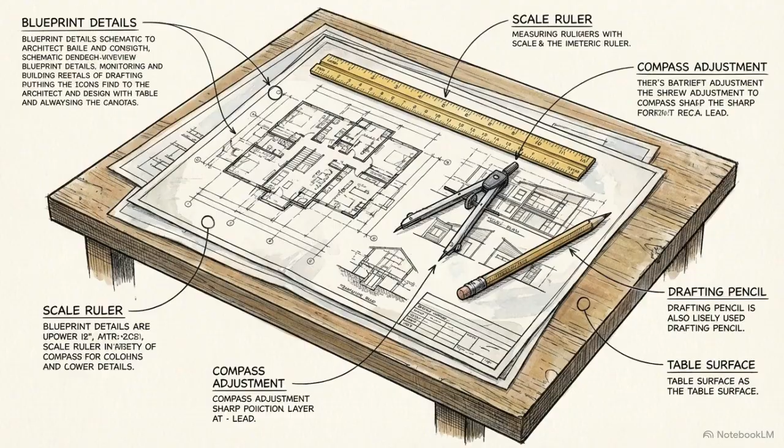Building construction is the systematic execution of planning, architectural, and design work. It is the process of translating technical drawings into a permanent physical structure. To succeed, an engineer must solve a continuous problem of scale, bridging massive environmental forces with microscopic chemical reactions.

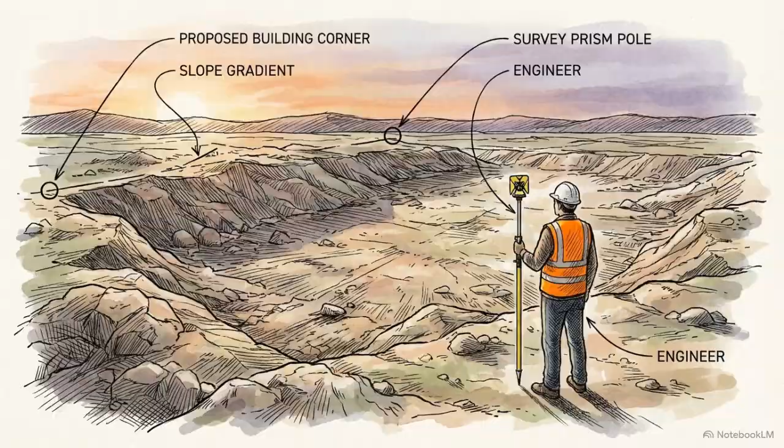Before a structure can rise, the builder must first master the macro environment, analyzing exactly where and how the building sits on the earth. Then they must master the microenvironment, the strict physical and chemical properties of the materials holding it together. We are going to track this process from start to finish.

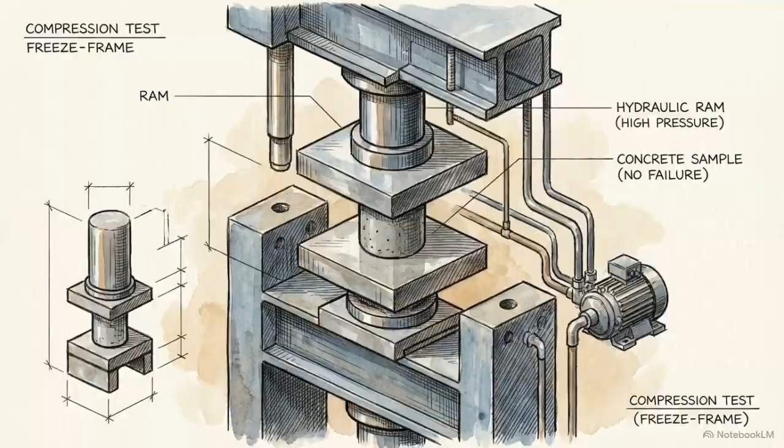We will select a site, map its physical threats, and formulate a custom concrete mixture designed to survive it. A finished building standing against the elements is the result of hundreds of hidden, interconnected calculations.

Site selection is a highly project-specific job. Every decision optimizes for two non-negotiable targets: safety and economy. Engineers analyze the terrain to immediately rule out specific hazardous zones, avoiding waterlogged ground, unstable backfilled sites, and riverbanks.

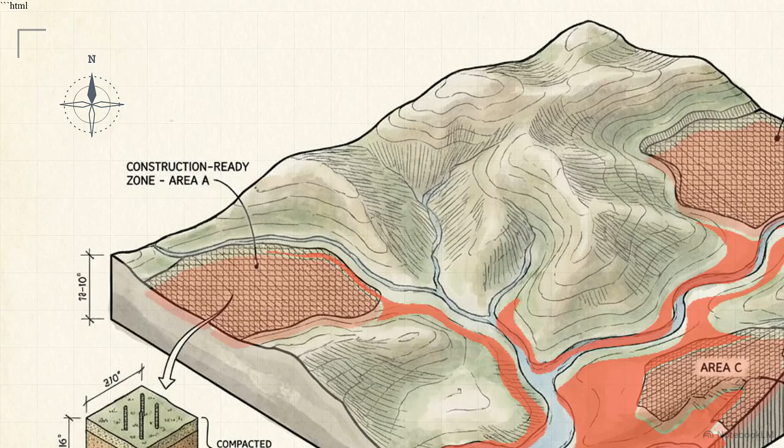Once a safe footprint is found, the building's orientation aligns to endure external vectors, positioned to manage the sun's path, wind direction, and local rain. These environmental forces dictate the design of the two primary components of any building, the substructure and the superstructure.

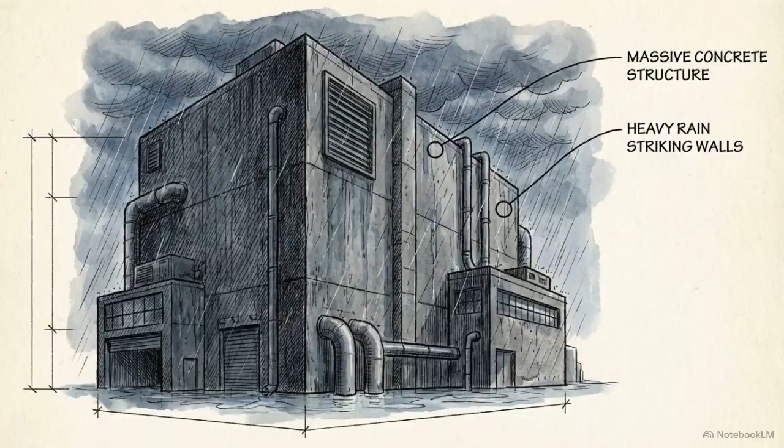The substructure's sole role is to safely transfer the entire load of the building deep into the subsoil conditions. The superstructure sits above, carrying out the building's actual purpose, whether residential or industrial, while enduring the continuous climatic conditions. Long before any architectural aesthetic is applied, the local terrain strictly dictates the building's geometry and foundation.

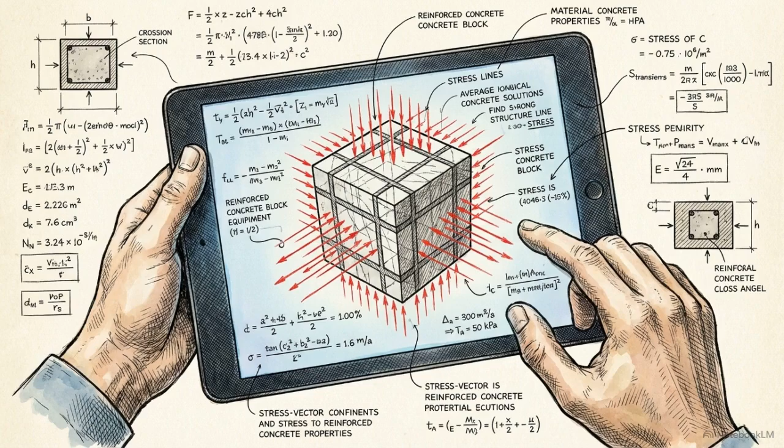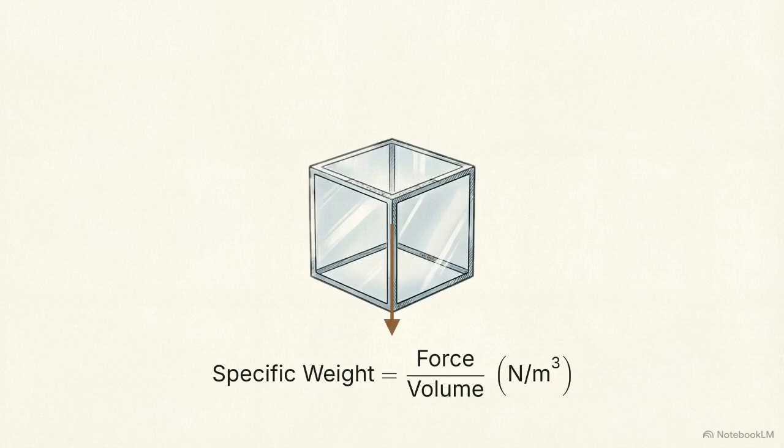To survive those mapped environmental forces, engineers must mathematically quantify how a raw material will behave under intense stress. They calculate its specific weight, the force per unit volume, measured in newtons per cubic meter, and its specific gravity, the material's density ratio compared to water.

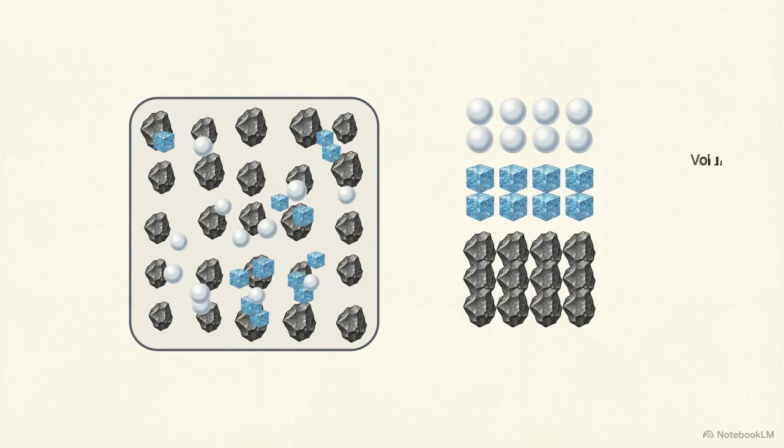This diagram shows the concept of the void ratio. It measures exactly how much empty space exists within a material, comparing the volume of voids, air and water, against the volume of solid particles.

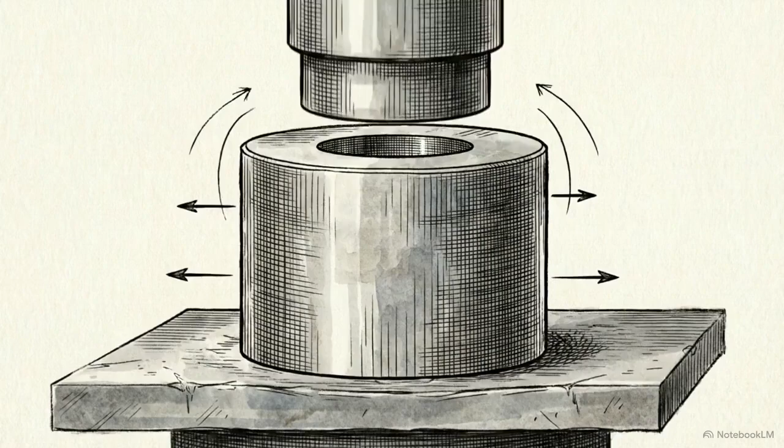Beyond static weight and density, materials must be evaluated for their characteristic behavior when actively pulled or compressed by the environment. Engineers contrast ductility, how a material stretches, against malleability. Malleability specifically measures a material's capacity to deform or flatten under compressive stress without breaking or cracking.

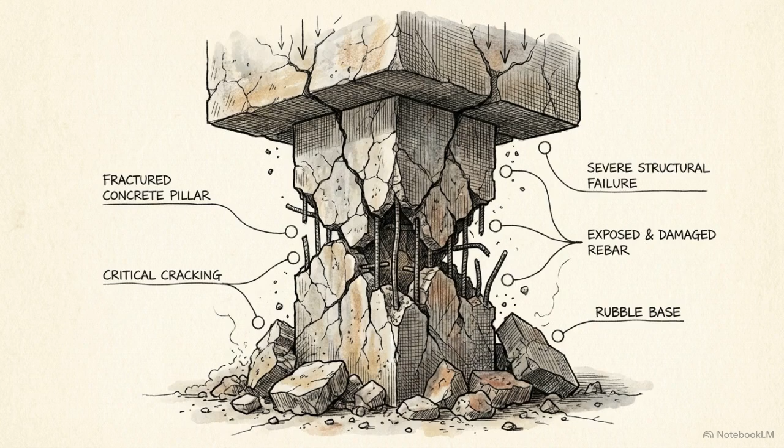Structural failure occurs when the specific gravity and void ratio of a chosen material cannot mathematically withstand the macro stresses mapped onto the site. Concrete is a composite material formulated to solve these structural equations, relying on construction aggregate for its physical bulk.

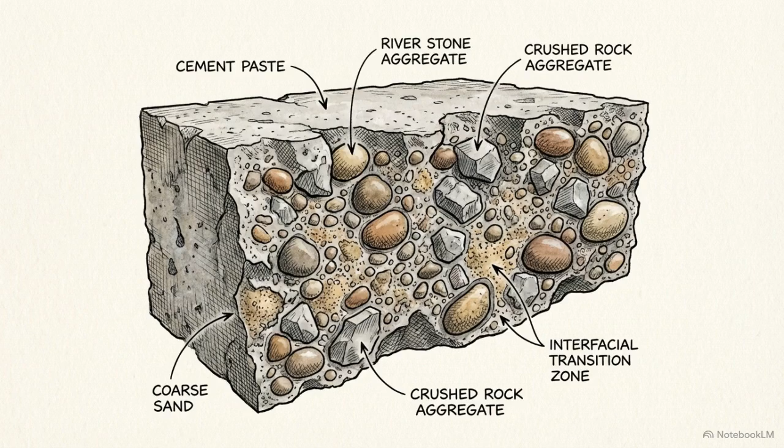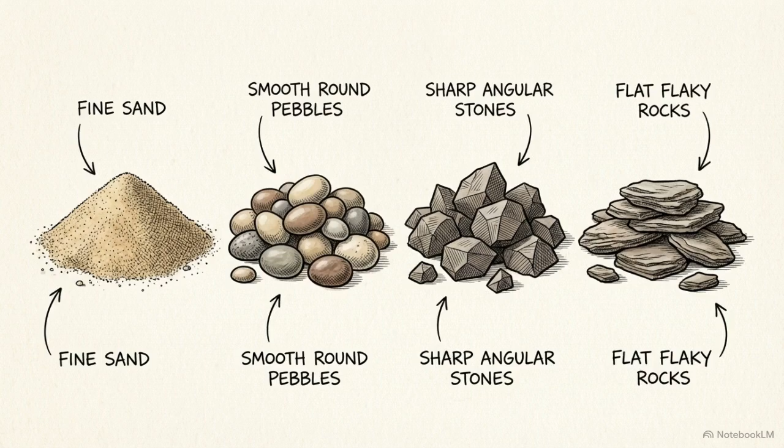The aggregates are strictly categorized by size, ranging from fine sand to coarse grit, and by shape, graded as round, irregular, angular, or flaky. The selection follows a strict sizing rule.

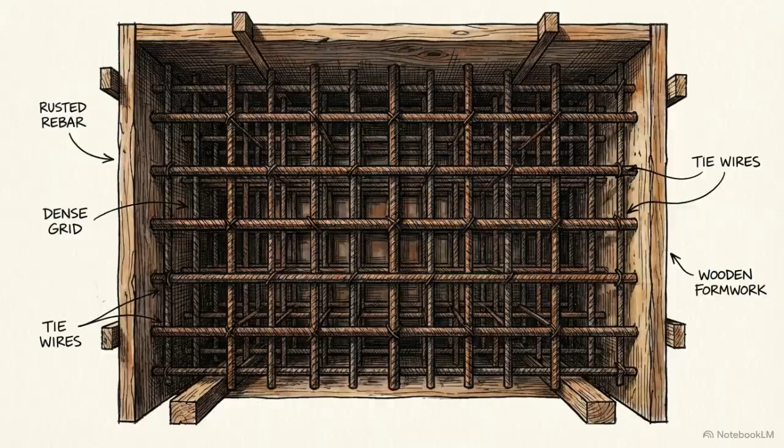The maximum size of the coarse aggregate is limited by the internal skeleton of the building. It must easily pass through the narrow spacing between vertical steel reinforcement bars. This creates a physical constraint. The internal skeleton of steel reinforcement dictates the maximum aggregate size. Without this precise fit, the concrete cannot pack densely enough to achieve its intended load-bearing strength.

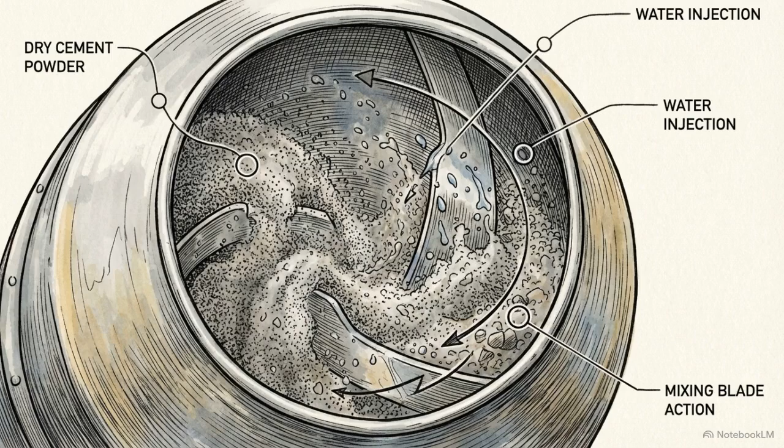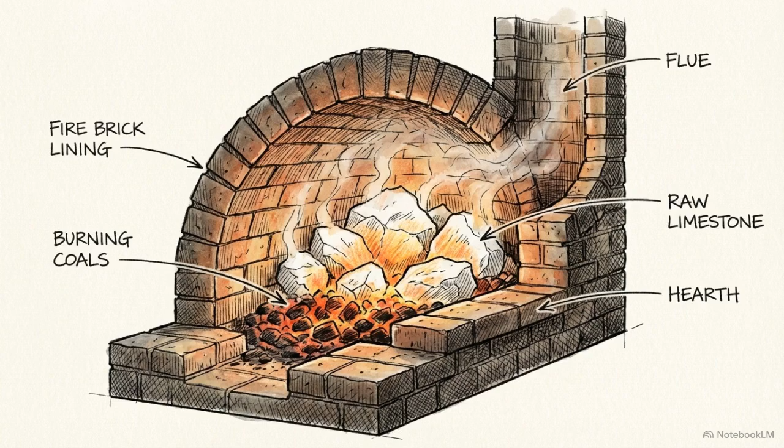But aggregate is essentially inert rock. It requires a powerful chemical binder to lock it into a structural solid. Historically, builders achieved this by calcining limestone to produce caustic quicklime, calcium oxide, which reacts with water to become slaked lime. Modern construction demands more specialized chemistry, relying almost entirely on Portland cement.

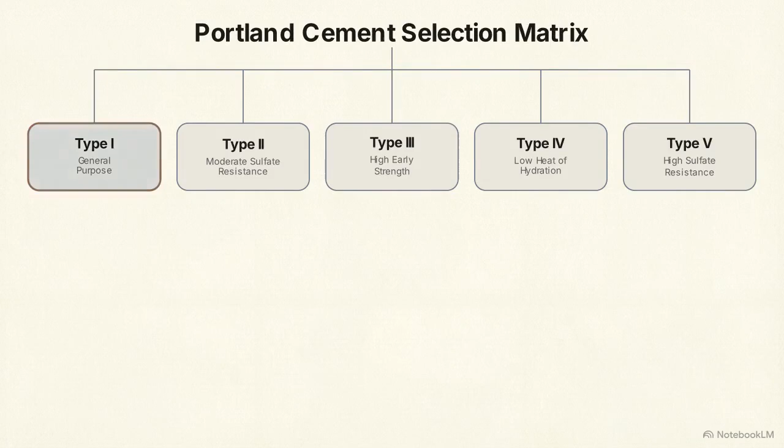This flowchart details the matrix engineers use to match Portland cement types, I through V, directly to local site threats. Type I is for general construction. However, types 2 and V provide sulfate resistance, an absolute requirement if the substructure is exposed to toxic groundwaters.

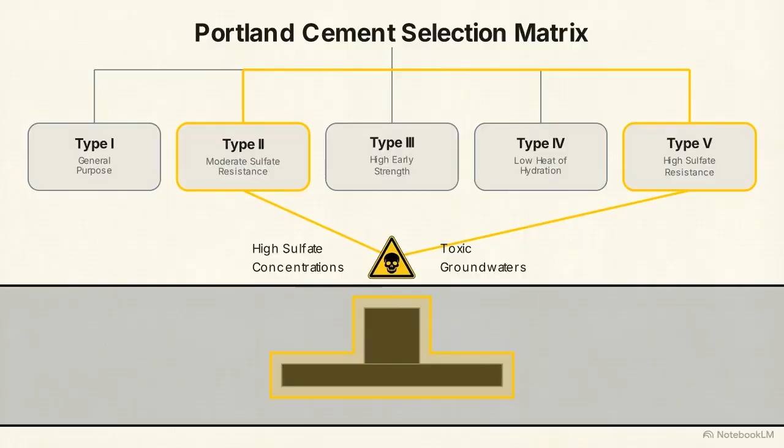Other applications require different thermal and physical properties. Type 3 is ground finer for high early strength and rapid deployment, while Type 4 is formulated for a low heat of hydration.

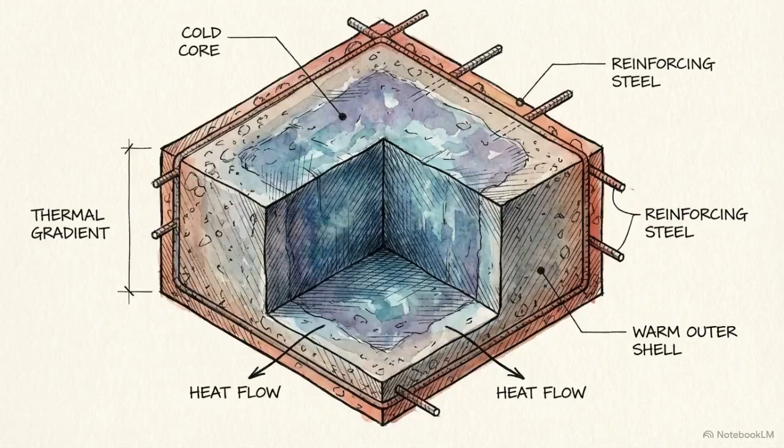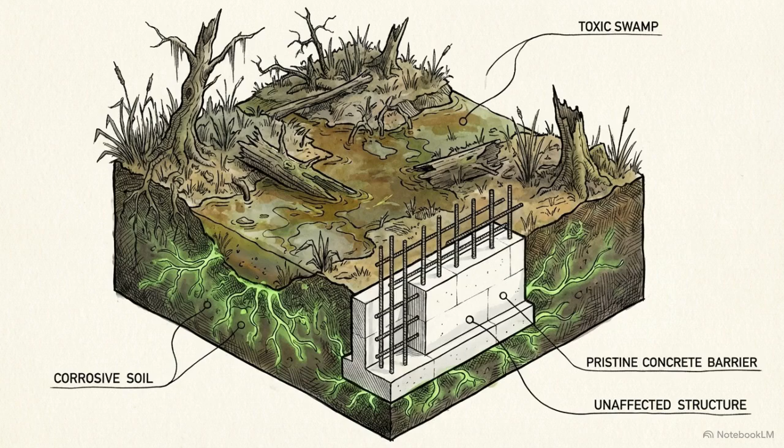Even a mathematically perfect chemical formulation is vulnerable to human execution in the field. The primary catalyst added to the dry mix must meet a strict rule. Water fit for drinking is fit for concrete. It must be entirely free from dissolved salts.

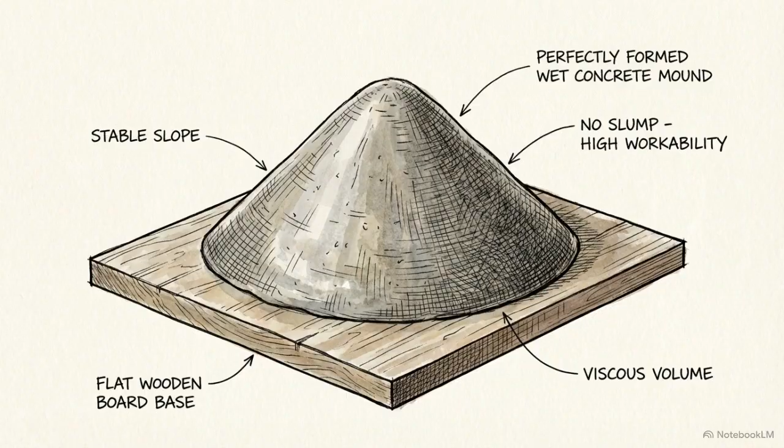The goal is workability, ensuring ease of placement while retaining the concrete's perfect internal homogeneity. Optimal workability requires a highly specific combination of well-graded aggregates and a sufficient amount of fine particles. In practice, sand naturally smoothed in riverbeds yields far more workable concrete than jagged sand manufactured by crushing stone.

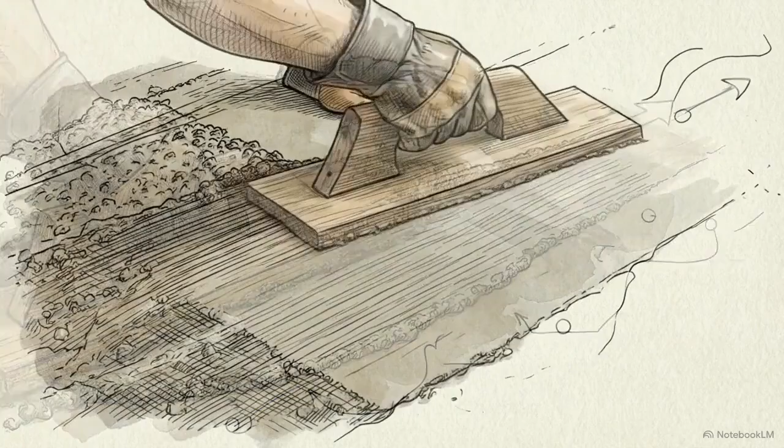Structural integrity ultimately relies on engineering a material pliable enough for human hands to mold without compromising its molecular strength. The entire discipline is a continuous engineering feedback loop, where macroscopic geographical constraints strictly dictate microscopic chemical solutions.

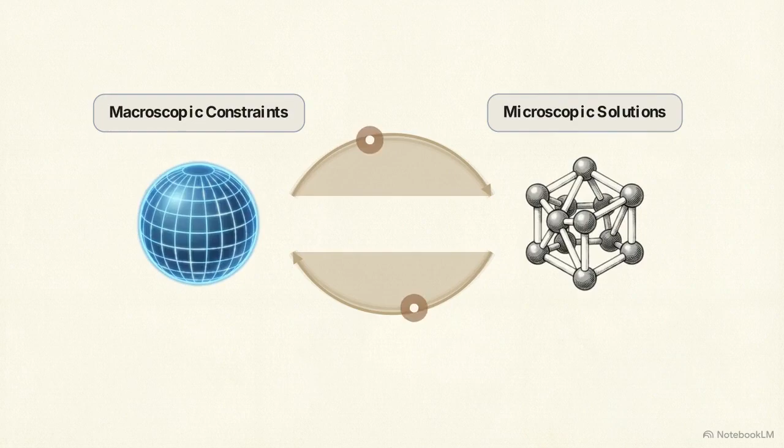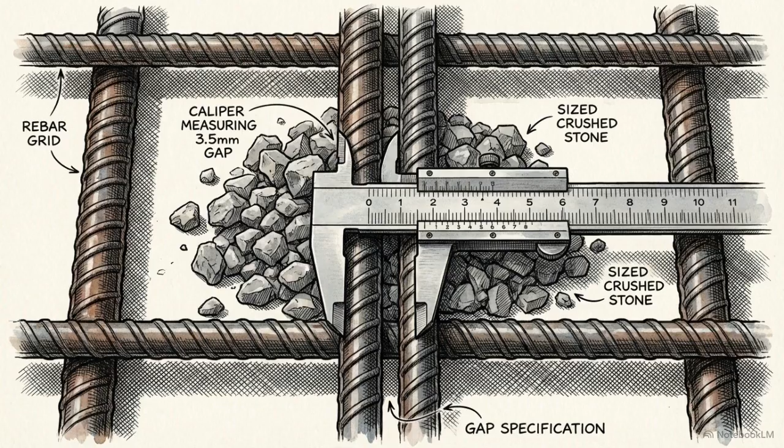A high-sulfate soil condition forces the specific selection of Type V Portland cement. Dense steel reinforcements inside the superstructure strictly limit the maximum diameter of the coarse aggregate, and complex on-site formwork demands the use of river sand to guarantee workability during the pour.

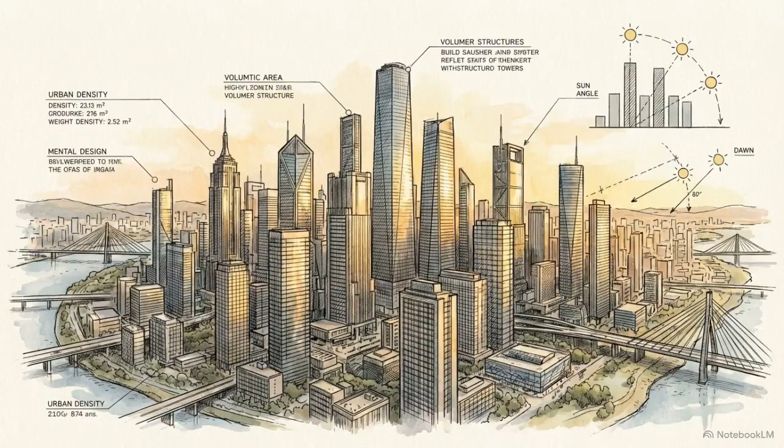When all of these distinct variables are successfully compounded together, the finished structure holds firm against severe weather and intense environmental stress. Building construction is the systematic calibration of physical properties to meet the demands of the local environment.